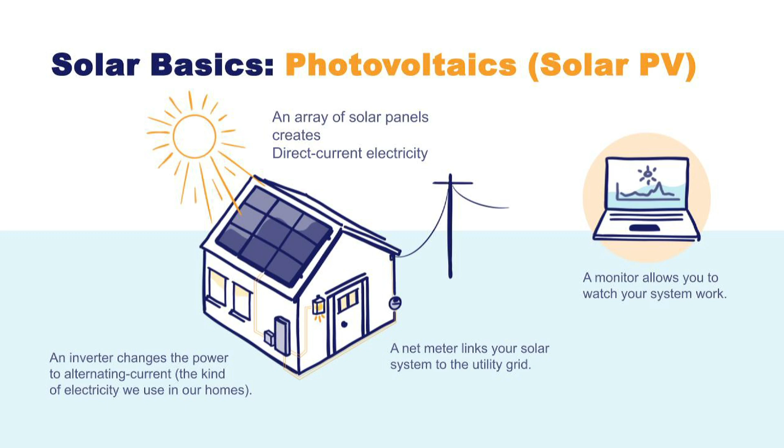The electrons will flow where they're most needed. So whatever is needed by your home at the time will get used in the house, and then whatever is excess will be exported to the grid through your electrical meter. So essentially, at nighttime when you're consuming your electricity, your meter is running like it normally would, counting up what kilowatt hours you're using. But when you're generating more solar than what your house needs at that time, that is essentially having your meter spin backwards.

I know we said we have some Q&A, but does anyone have any questions on some of that? It's basic, but sometimes people have a query or there's something interesting or confusing about some of the basics of solar. No? Okay.

Cool. So there are a number of incentives and regulations that have made solar, I think, possible in the first place. There is still, tenaciously remaining, the federal tax credit. It's fluctuated slightly in the amount, but it's represented as a tax credit, an ITC, and it's a 30% tax credit, meaning you can take 30% of the total cost of your system, $20,000, $40,000, whatever it might be, and if you have the tax appetite for that, you can claim the 30% tax credit and figure that into your cash flow and the payback year and the ROI.

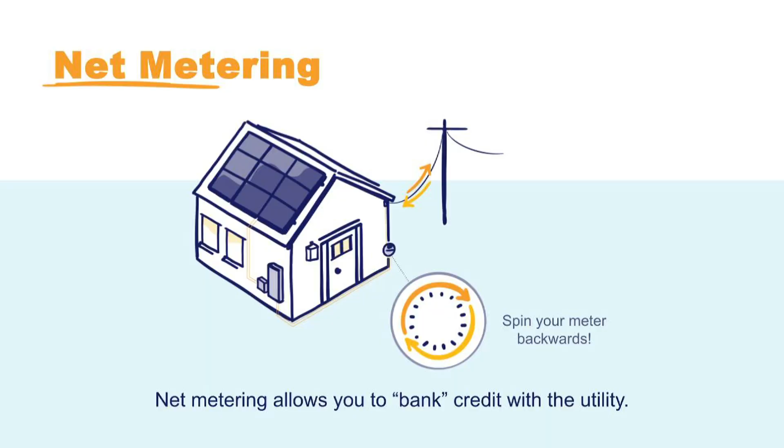And once we have that, Eversource will come out and they'll take your existing meter where it's only measuring what's coming into your house. They'll swap that with a bi-directional meter, so that'll be measuring both what's coming in and what's going out. And the important part of this process is that during every billing cycle, what matters is what that number on your meter is at the end of the month. So maybe during the sunnier months, depending on your system size, you may generate more than what your home needs, and you end up with a negative billing. The number that they're billing you for would be a negative. That's credited into a dollar amount, and you roll into the next month with a credit. It's not exactly 1-to-1, but it's fairly close. 90%-ish.

It's distribution, transmission, and supply and generation. It's depending on the town. It's usually around 30 cents per kilowatt hour for that excess. So depending on how the system is designed, you will roll into the winter months with a credit with Eversource that you slowly eat up when there's less sun, or if you have heat pumps, you're using more electricity in the wintertime to do heating and cooling. So that's generally the way net metering is working, and how your relationship of your solar array with the utility is functioning.

Yeah, if there's a power failure, even if you have solar and it's the next day and it's sunny, a lot of people don't know that you still won't have power. The system shuts off to protect line workers because it would be exporting power onto the grid, so it's for safety reasons. You still do pay a customer charge to have the privilege of being connected to the grid. I think it's $7 or $10 a month, depending on whether you're in Eversource territory or National Grid territory. There are some designations, and this may or may not apply to you or someone that you know, depending on the size of their roof and its production potential.

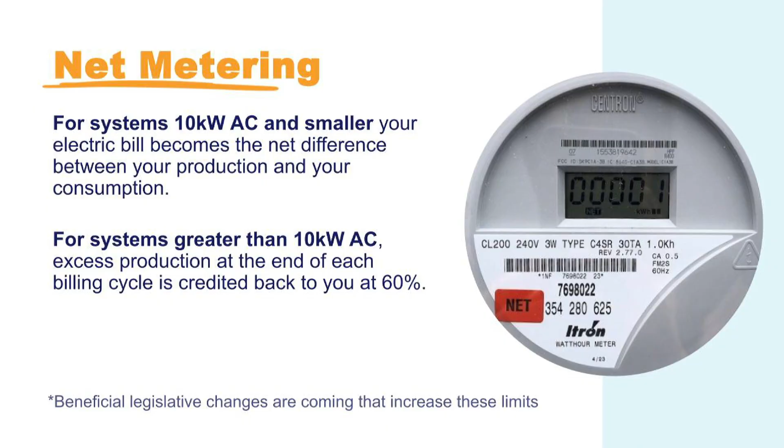But there's this cutoff of 10 kilowatts, and that's AC. So this is after the conversion has been made at the roof level from its direct current rating. What it actually generates in a given moment, if it's more than 10 kilowatts in alternating current, its real production, then the billing cycle is only 60% in terms of the net metering. I believe that you are designated as a qualifying facility, a QF. It's sort of utility company lingo, as it were. I think the minority of homes end up being that large.

There is a really important asterisk that there's some legislation that is going to allow homeowners, that cap is going to be lifted so that it will be a 1-to-1 ratio, which is only logical, I think. I think that it exists because the utilities sort of want, well, why do you think it exists? Why did we have this cap? Well, I mean, the Massachusetts Department of Public Utilities influences, they're essentially pressuring the utilities to have net metering.

So to incentivize solar in Massachusetts, to help the state and cities and towns reach their sustainability goals and their carbon reduction goals. But obviously the utilities don't want to do this. It's not necessarily in their financial interest to have tons of solar. So there's always a bit of a battle to get the net metering to be the way we want it to be, us in the solar industry and homeowners who have solar.

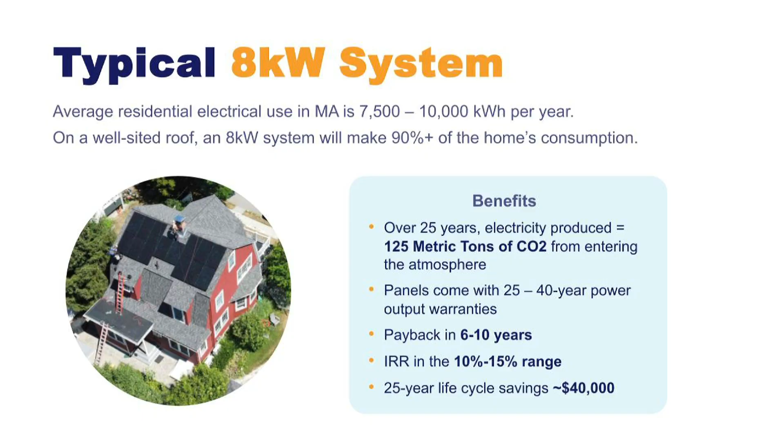But again, we've definitely seen 6 to 10 years, and then after that, you're essentially making money in the respect that this would have been money going out to the utility that you're keeping in your pocket. Internal rate of return 10 to 15%, and a 25-year life cycle savings of 40,000. That seems low to me. I think it's really higher than that over that 25 years. But that's this model. I don't know what the details of this model were, but I think it's higher. I agree. I'm seeing some five-year paybacks and some higher ones.

We have a couple of slides on finances. I want to check how we're doing. I think we want to kind of keep it going. We want to make sure we leave enough time for questions. We don't want to just talk at you. We want to make sure we can go through the slides so people have questions about it. That's great. Just so they see the topics.

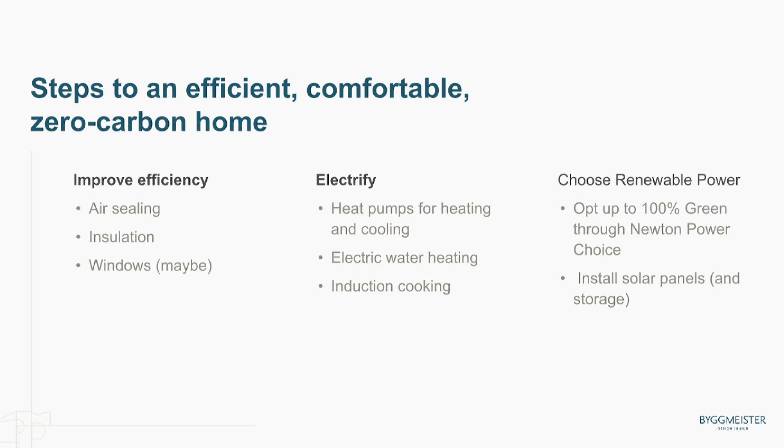And then not going to talk a lot tonight about solar because it was covered. But as you mentioned, if your house is not a good candidate for solar, there are other options. Certainly the starting point is opting up to 100% green through Newton Power Choice, but there's community solar.

So every existing house is different, right? So there is no one size fits all home energy plan. It depends on the age, the condition of your major systems, such as your roof or your mechanical equipment, depends on your home's architectural style, other needs and plans you have for your home, how long you're planning to be in your home, and your budget. So I can't sit here and tell you, here's the plan, go and implement it. That said, in our experience, there are some common elements to a good energy plan, and so that's what I'm going to focus on here, what I see as the 5 key elements to a good home energy plan.

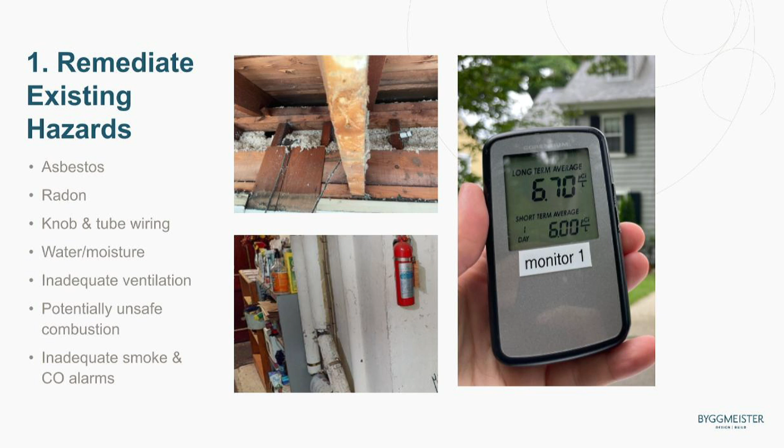Another one that is not typically tested as part of the Mass Save assessment is radon. We test for radon on all of our projects. Another common one is asbestos. The slide here shows a photo of what's known as friable asbestos. This is asbestos that's starting to crumble on pipe insulation for heating pipes. So in this project we're going to be replacing the steam system, so we're going to be hiring a specialized asbestos abatement contractor to remove that asbestos pipe insulation properly. And so it's good to know about these things, to know what's present. I thought on the way over here, I should have put lead on here. That's another one to think about when you're doing a renovation or a retrofit project.

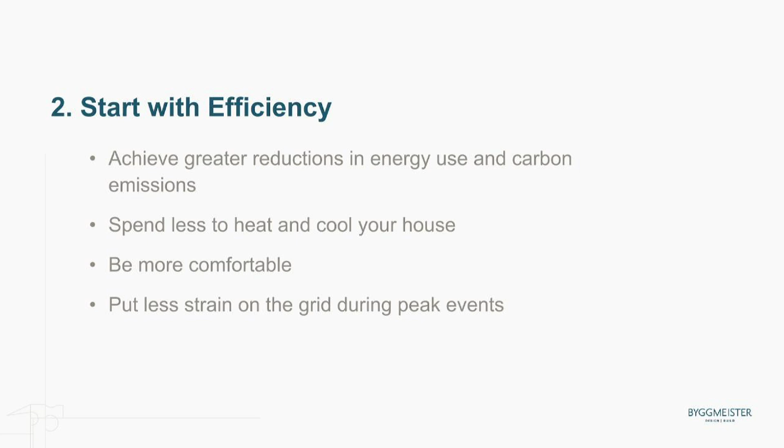So that's number 1. Number 2, and this is a general guideline, I wouldn't call it dogma, but if you haven't done anything, at the very beginning, you typically want to start with efficiency. There are several reasons to start with efficiency, but in general, the more you can reduce your home's demand for energy, the less energy you're going to use, the less you're going to spend on energy. It's going to help you out when it is time to electrify. You can install right-sized equipment for your home rather than a larger system than you would need if you hadn't done the efficiency work. You're going to be more comfortable.

This is maybe getting beyond the scope of this talk, but there's also a grid citizenship component to this, as there's a massive build-out of utility-scale solar and wind that's going to be required for us to electrify everything. The more that we can reduce the demand for energy, we're hopefully cutting into what's required for that build-out. Again, that's beyond the scope of your particular home, but it's something that we think about a lot: we need to balance the investments that we're making in load reduction with what we're doing to build out the grid to meet all of those new electric loads.

Okay, so how many people here have had a Mass Save assessment? Okay, everybody here, so I'm preaching to the choir. If you haven't, or if it's been a while, it can be good to get another one because some of the aspects of the program are evolving.

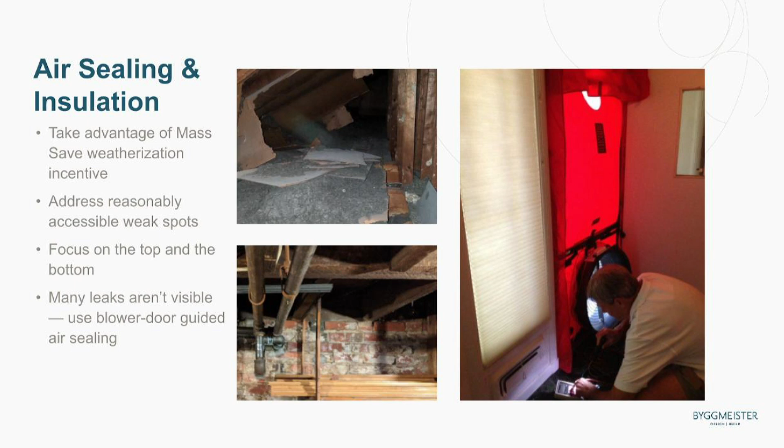But really, starting with efficiency means addressing what I think of as the low-hanging fruit, the reasonably accessible weak spots in your building envelope, typically at the top and the bottom of the house. I don't know how many weatherization contractors use a blower door to quality control their work, but that is a key. If you have the opportunity, hire an air sealing and insulation contractor that's going to use a blower door to quality control their work in improving the air barrier.

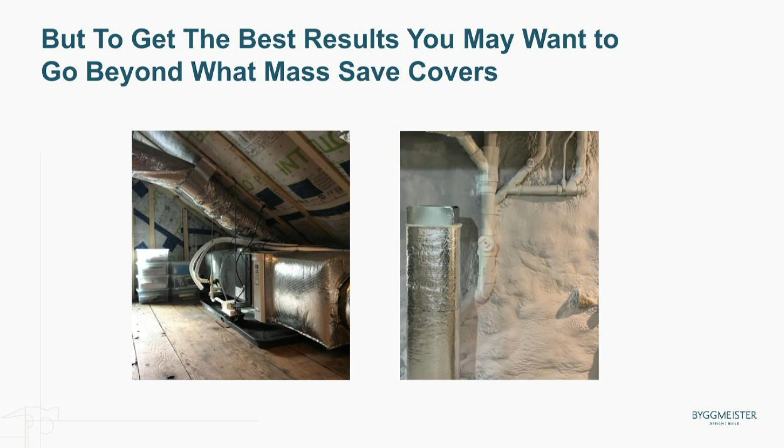It's also important to know that there are times for your particular home and your particular needs where you may want to do more or something different than what Mass Save incentivizes in terms of the efficiency work. The two that are most common in our projects: at the top of the house, Mass Save incentivizes putting the air barrier and the thermal boundary at your attic floor, so air sealing and insulating at the attic floor. But if you're going to be installing a ducted heat pump, or even just using your attic for storage, it makes a lot more sense to move the thermal boundary to the underside of the roof. And that's what I'm showing here, on your left or your right, whatever.

And another example is, Mass Save covers air sealing the rim joist of your basement. But we often find in our projects that it makes sense to take that all the way down the basement walls, often because you're also putting mechanical equipment in there. It also helps that spray foam insulation is vapor impermeable. So if you're trying to address moisture issues in your basement, it really contributes to not just thermal control, but also vapor control. So start with Mass Save, but don't necessarily end there. Oh, yes.

I think one thing just to make really clear is you're saying we want to have our mechanical equipment inside the conditioned space of our home, not outside. Yes. Did everybody hear that? I'll repeat it. You want your mechanical equipment to be within the thermal boundary of your home rather than outside. So if, for example, you're going to be putting an air handler and a ducted heat pump in your attic, and the insulation is at the attic floor, you want to move it up to the roof. Bring the equipment indoors. And the reason for that? Efficiency. If it's close to the same temperature that you're trying to maintain in your house, it's going to work a lot better.

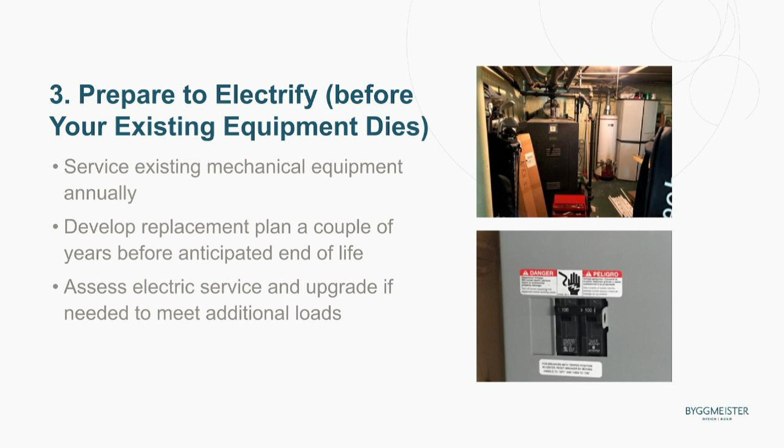And I would say, start talking to heat pump installers, and I'm really focused on heating, but it's also true with hot water heaters. Start talking to people a year or two before you think you're there. Start figuring out what your plan is. Similarly with your electric service. If your house only has 100 amps going to it, you're almost certainly going to need to upgrade your electric service. You could possibly get away with a smart panel. Those aren't really widely used yet, but I would say 100 amp service.

Do you agree with that? Upgrade to 200? Yes. Yeah, upgrade to 200, especially with people doing car chargers, et cetera. Correct. So the wait time for that equipment can be really long. We have people who've been waiting a year to upgrade their service. So that's another one to get your electrician on. If you have 200 amps, that's typically good. We have some larger homes that need to upgrade to 400, but that's pretty unusual for the projects that we do. So that's another one to prepare.

So I would say if you have an electrician, talk to your electrician, get them to come and take a look at the service that you have. If they think that they need to do an electric load calculation based on what you're planning to move ahead with, have them do that. If you don't have an electrician, ask one of your neighbors. But yeah, as you're thinking of preparing to electrify, and an EV is another good example we haven't talked about, you want to make sure your service can accommodate that. So that's maybe step one.

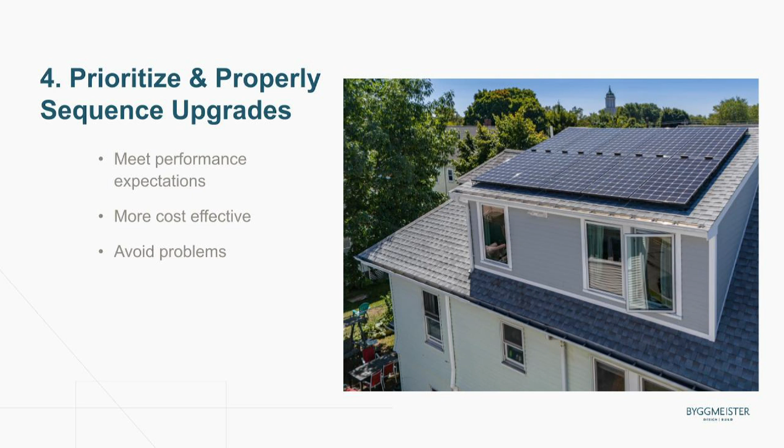But because they had already done the ductless heat pumps, we were able to take down the chimney that was no longer needed for the oil boiler that they have. So the fact that they did that first allowed us to take down the chimney. The roof itself didn't need to be replaced because it had been replaced a couple of years before they moved in. But because we were gutting the entire third floor, we were also able to prepare the structure for the solar. Them thinking ahead about the order that they were doing things in allowed us to achieve optimal results.

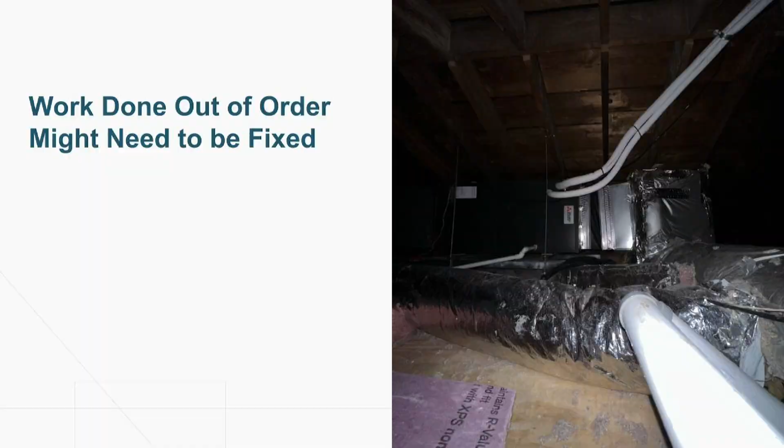We disconnected the ducted heat pump. We insulated at the roof line, the area of the roof where the air handler was installed. We also tested the ducts. The heat pump installer reused existing ductwork from a conventional air conditioning system that had been there before. We were able to save some of that, but we had to change a bunch of it in order to make the system work properly. This is going to be the first year since we've done this work that they're going to get through the winter, and fingers crossed that they're really able to not use the oil at all or very, very minimally.

Again, not the worst thing in the world, but it definitely added hassle and cost for them to have this installation and then have us go back, disconnect it, make these fixes, and put it back together. And no diss to the heat pump installer that did this. You're working with existing constraints in existing homes, and it's a judgment call. How much ductwork do you save? How much do you get rid of and change? And people have tight budgets, and you have to figure out how to work with them. So there's no perfect system. And again, not the worst thing in the world, but if you can do things in the right order, it's great. Oh, did I skip it?

Yeah. Okay, last, near and dearest to my heart: every renovation project is an opportunity to improve performance. If you're going to renovate your kitchen, take an opportunity to say, okay, what else can I do to make my house more efficient? Maybe my equipment is not at end of life, but what should I be thinking about that I'm going to need to do 2 years from now, 5 years from now, 10 years from now? So use that as an opportunity.

And one that we're excited about, which is newer to us, is a game changer for air sealing: a product called Aerobarrier that we used at this project that we're just finishing up now. So what is Aerobarrier? It is an acrylic sealant that's been used for many years in duct sealing. It's applied as an aerosol that fills the cracks and the gaps, and it's now being used not just for sealing ducts, but for whole home air sealing. Used first in new construction, but it's being used now in retrofit applications.

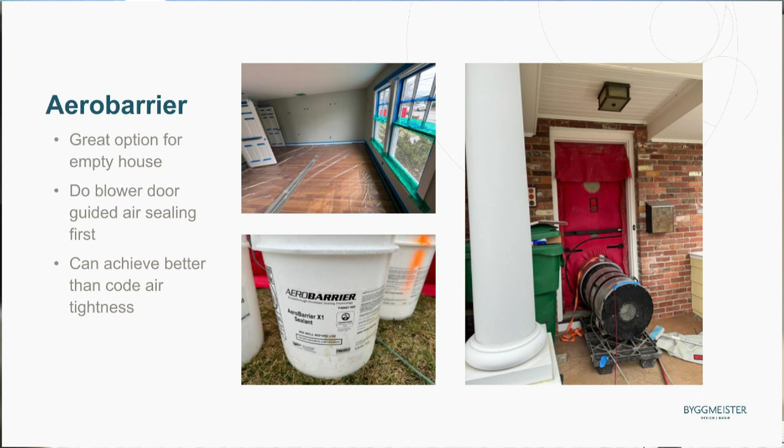With our conventional, standard envelope improvement measures that we do on all of our projects, we were able to cut that more than in half to 6 air changes per hour. But then with the Aerobarrier, we got it to 1.5 air changes per hour, which is twice as good as the code for new construction. It's not best in class. Best in class is Passive House, which is 0.6 air changes per hour, but it's pretty good for an existing home.

And so this is not going to be something that every home is a good candidate for, because most homes are being worked on and people are living in the homes. They're not doing a full gut renovation, but absolutely when there's gut renovation or when a house is changing hands, it's a really good tool that I'm really excited about.

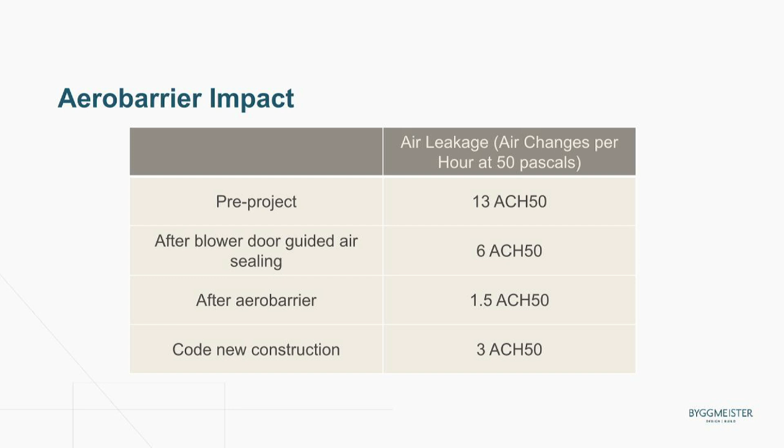Okay, all right, final thoughts. This one I have to read because I don't remember what I wrote. Okay, take advantage of Mass Save, but don't let the incentives dictate what you do. Start with efficiency, but don't get stuck there. Make sure you're on top of the age and condition of your systems so that you are prepared before something fails. Be thoughtful about the order. And if you're renovating your home, seize the opportunities that present themselves to make performance improvements. And we'll stop there and take more questions.

Great. Well, thank you to all of you. Really appreciate it, a ton of information. Now it's time for all of your questions. Do you have questions? I have one. We are renovating our home, a two-family, so I have tons of questions. I'll also stick around after if you want to ask more questions. Yeah, I think we all will.

And considering solar possibly too, but one is on the heat pump HVAC system. We've had a bunch of different companies come in and give proposals, and we're still not clear, for cold winters, with our currently leaky house, which maybe we could improve substantially, do we need to have a dual fuel system, like a gas backup heat when it gets cold winter days? So that's a great question and a very common question.